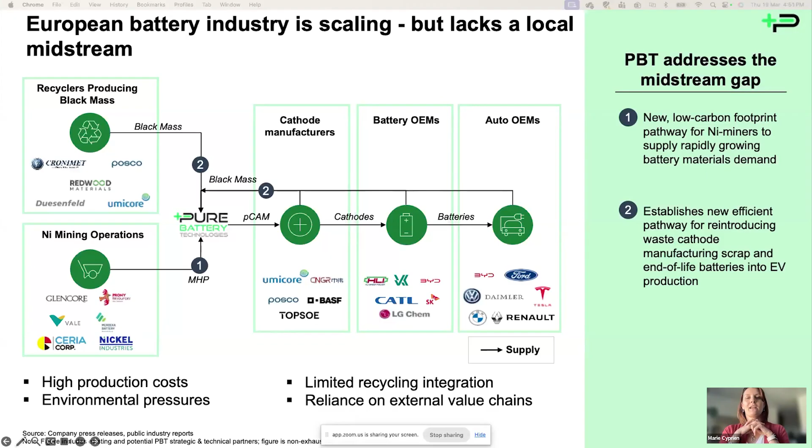Ultimately, it is blocking that full circularity to enable recycled material to come back into the supply chain. This is the gap that PBT is aiming to fill. We want to create a new low carbon pathway for raw material to enter the European supply chain, and also a new pathway for recycled material to re-enter that same supply chain. We want to do that by refining locally, building up resilience with a low carbon footprint and being cost competitive, because if we're not cost competitive, there is no way we can sustain it in Europe. So we have to do it differently to meet this objective.

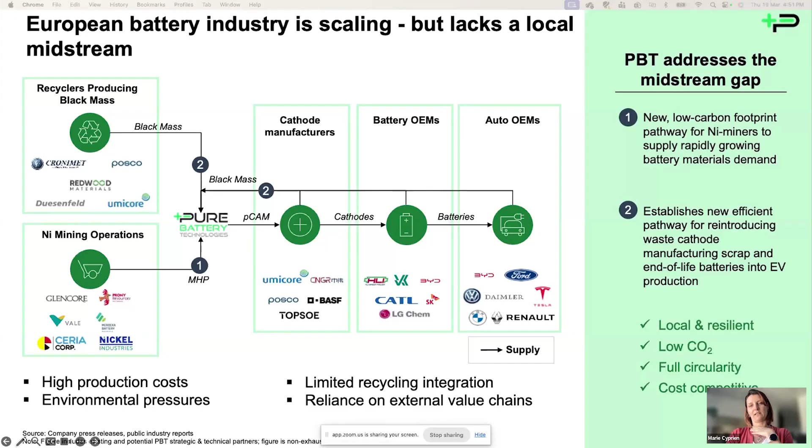So what we propose is to use our technology to refine MHP and black mass directly into pCAM in Europe. pCAM is the precursor to cathode active material, one of the key elements in the cathode that is a key driver to its quality, cost, and performance. PBT was founded in Australia in 2017 based on technology developed at the University of Queensland. We've developed and patented both the SAL and CL technologies that enable us to produce pCAM directly from MHP and recycled black mass. Let me tell you a bit more about these technologies.

The SAL and CL are really changing the way we make pCAM. A very common route until now is to use solvent extraction, which means refining each metal individually, separating them, crystallizing them, turning them into pure salts that then we mix back together to make the pCAM. That requires a lot of steps and a lot of energy. Our technologies enable us to keep the metals together and produce the pCAM directly without making the salt intermediates.

The other key differentiator is that we can process both MHP, which is a mine intermediate, the mixed hydroxide precipitate, and black mass, the recycled material from end-of-life batteries, together or separately through the same processing line. So we don't need separate plants to deal with them. We end up with a much simpler process, meaning less equipment, less energy, less reagents. We don't need solvent, and that ends up with a much lower carbon footprint and a lower cost, which makes it competitive and viable in Europe.

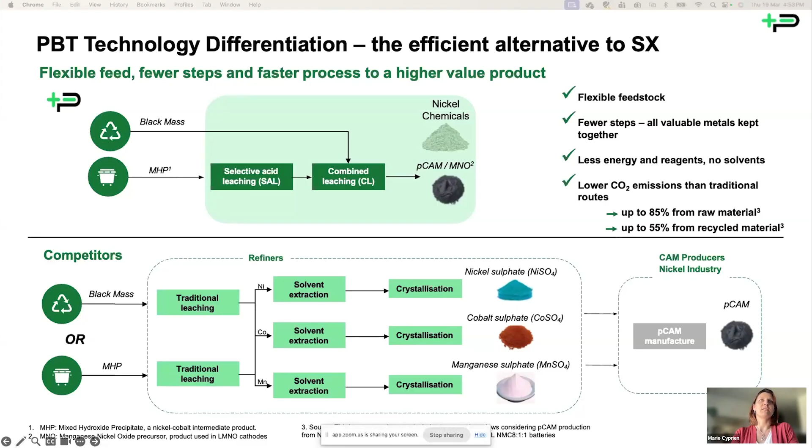And that's where we plan to use it. PBT has a refinery in Hagen, Germany, that is already producing nickel product. We've got a very talented and expert workforce that has been producing nickel product for decades. We've been able to retrofit equipment in the refinery to prove at industrial scale our technologies.

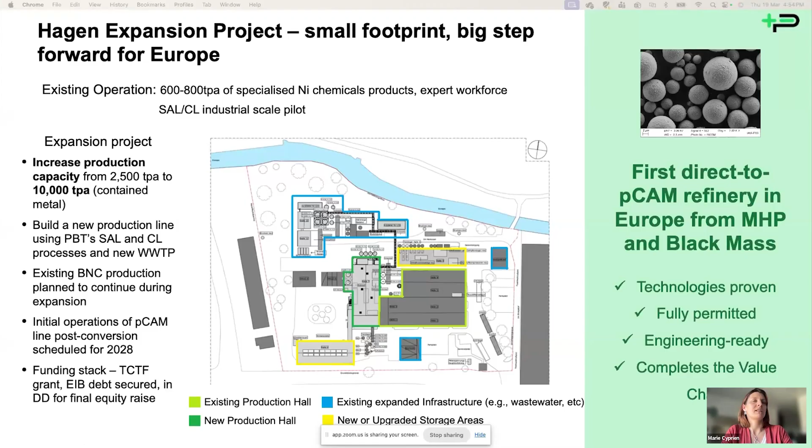So we have planned a full project in this refinery, basically a full expansion to become the first direct-to-pCAM refinery from both black mass and MHP, where we can produce 10,000 tons of product in metal. The technology is proven, it is fully permitted, the engineering is ready to move into execution, and we're running through the final round of funding so that we can make it happen.

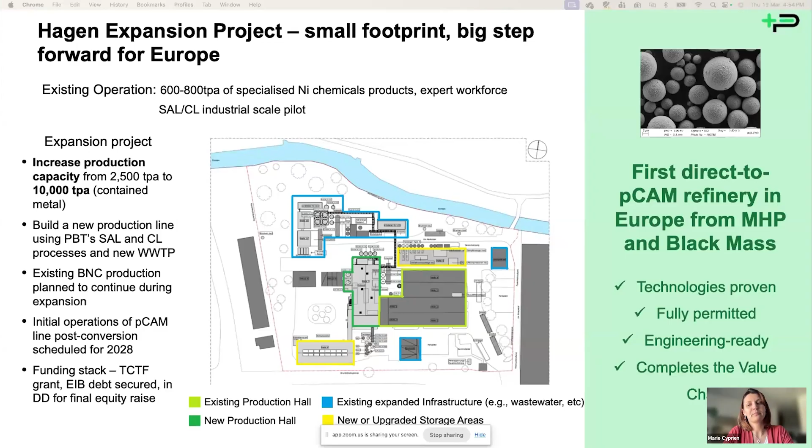And we get the circularity that we need in Europe. So that's where we're at. Thank you, and I would welcome any interest in our projects. We are running through the last round of funding, and we're also growing and looking at some expansion projects in other places of Europe, Indonesia, and US. So any interest, I would be happy to discuss. Thank you.

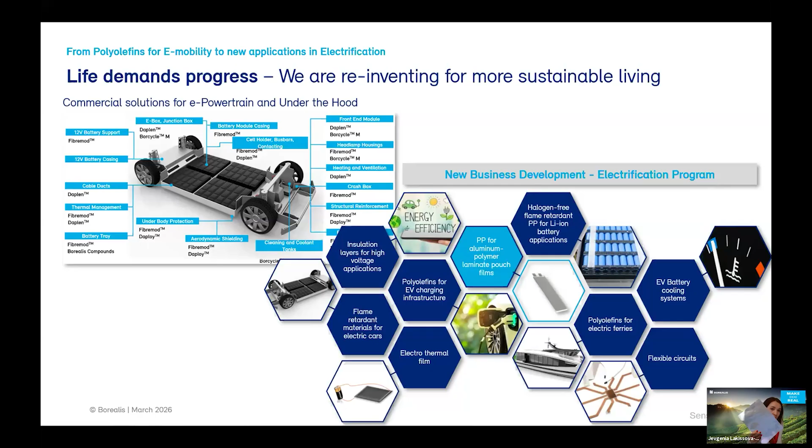What we are offering is the material that can be used in the laminate that keeps the cell together. I will come to this in a moment. Typical pouch cell packaging is a multi-layer structure. So what you see is an end product, but the critical element where Borealis can add value, and does add value, is the inner sealing layer. Maybe it doesn't come across very clearly, and maybe it doesn't look very impressive, but it's actually a thin 80 microns casted polypropylene film that essentially prevents any leaking in the pouch cell due to its sealing strength.

The difficulty of working in this industry is that we're a few steps down the value chain, but at the same time, if our polypropylene formulation fails, then the cell will fail, the sealing properties will not be achieved, and it leads then to a safety issue, essentially. So that's the product I'm pitching today, the polypropylene for creating this inner sealing layer within the pouch cell laminate.

Since it's a pitch, I wanted to maybe say a few words also on why it's important to bring this product to the European market. We are all aware of the Critical Raw Material Act, or the Battery Passport coming into force next year. Now, polypropylene is not a critical raw material, there is supply, but what we're seeing with geopolitical events, the supply of essential elements of the battery, of the cell, can become a risk for scaling up operations. So having this type of materials available locally is very important. It not only improves the lead times in the operations, but it's an essential part of de-risking the scale-up strategy.

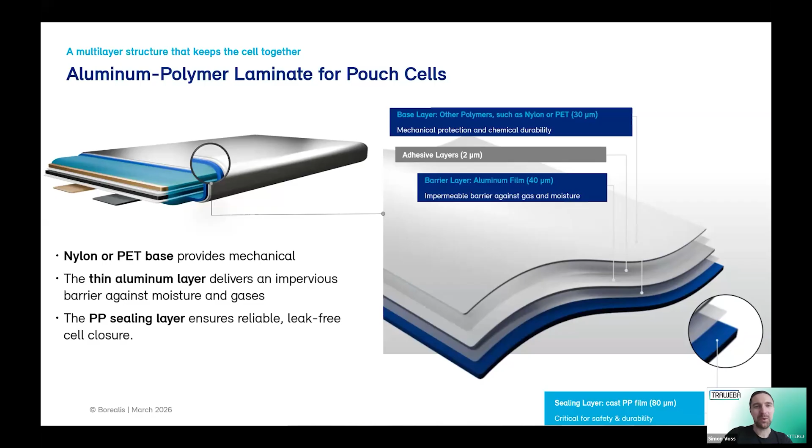If you consider a battery, it mostly is just a black box. And if you have ways to see what happens inside of that black box, that is very important. Mass spectroscopy could be one of the ways to actually see what is happening inside and give us really valuable information about degradation processes happening in the cell. That can be really valuable information for a lot of different questions and also optimization of the cell.

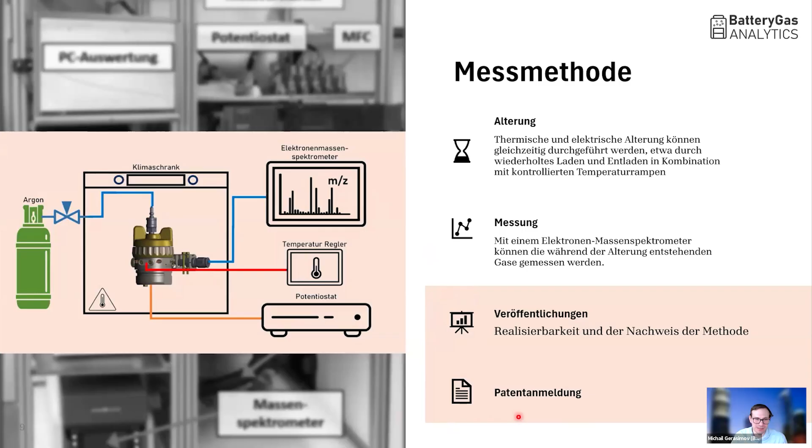These measurements have already been published at some points, and we're also currently in the process of getting the patent for our measurement stand to be able to offer the service exclusively to you.

What kind of services do we want to offer? Well, there are 3 levels, basically. You can send us materials, and they can be secret, so we do not need to know what kind of materials you send us, and we just measure them. We can also analyze the gases if you tell us what materials we have, and also simulate them, which is the last layer of our company.

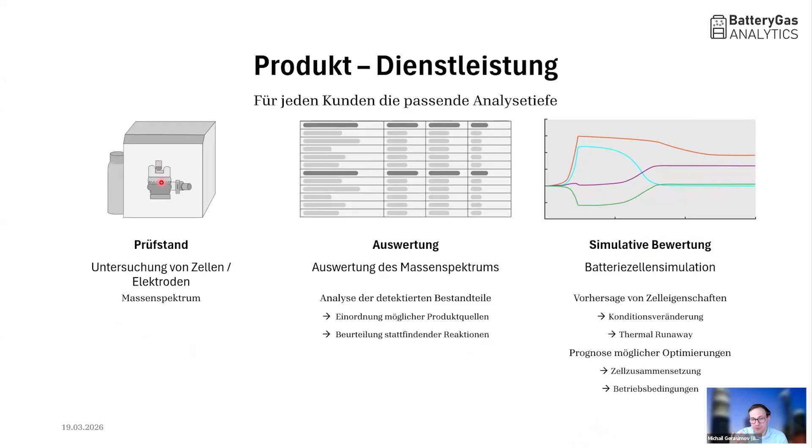So basically simulate what is happening inside. For instance, SEI changes, at what temperature do they have? Maybe with another additive, it changes again. So you can see, after evaluating it in the simulation, we can come back to the measurements then with, for instance, new additives and test the batteries again.

So what is the team behind our company? As I mentioned, Richard and Luca are both my co-founders. One guy, Richard, is looking at the simulation stuff, and Luca for the measurements, and me being the head of our company. We're currently, like a lot of people, looking for investors and potential partners to investigate it even more and basically run the services now.

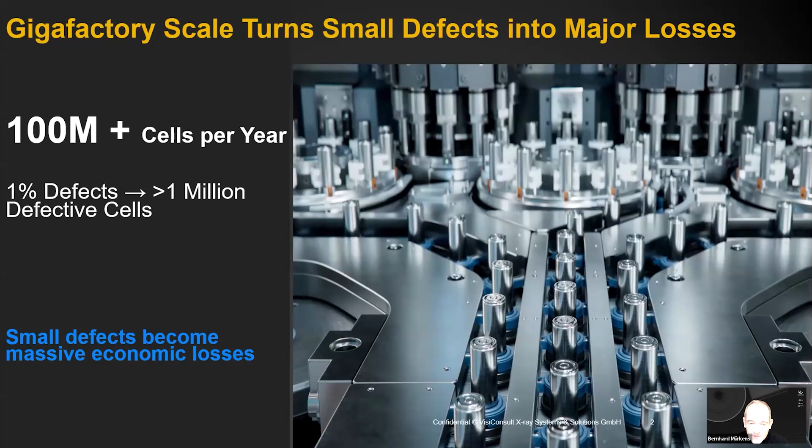Today I will show you how scaling battery production requires scaling quality inspection. So what does it mean? At Gigafactory scale, we're talking about 100 million cells. And even a small defect rate means about 1 million defect cells a year. So you can imagine then small defects become a real massive economic loss. Keep this in mind for the stage.

So when you look into what's done today, electrical testing is just producing indirect results. An external inspection with cameras only shows the surface. A post-process analysis always gives you delayed feedback. So what's important is there's no direct link between a process parameter and an internal defect. You really have to see that this is a gap.

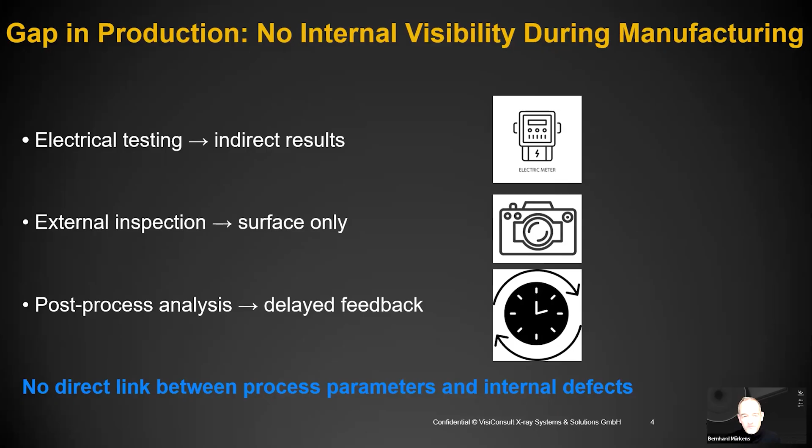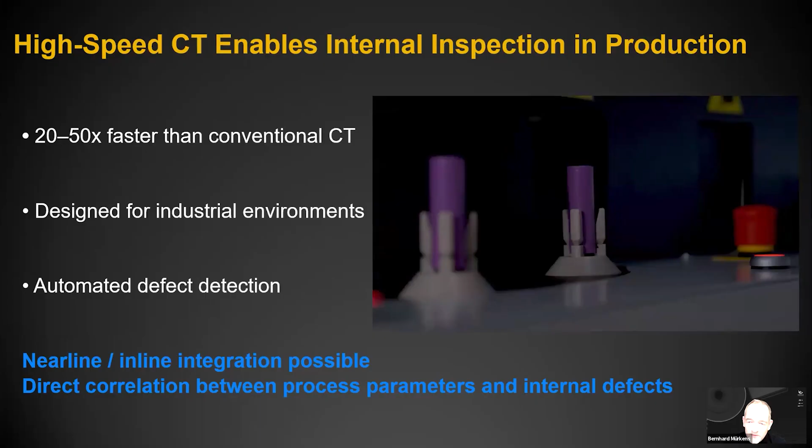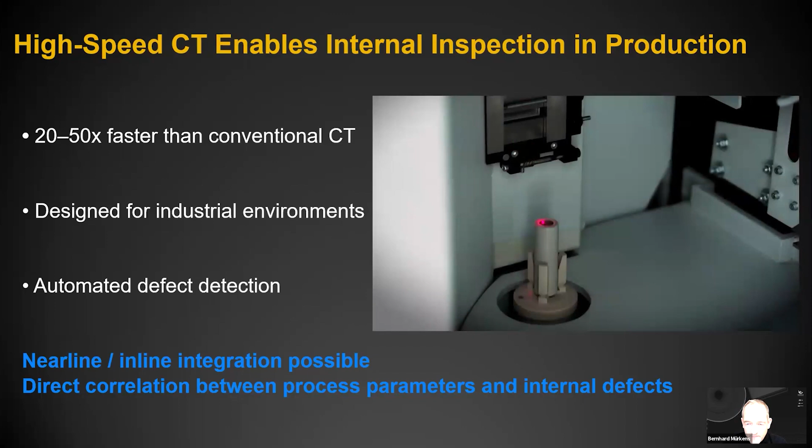And that's where high-speed CT comes into place. This is high-speed CT for inspection in production. It's 20 to 50 times faster than conventional CT. It's really designed for industrial environments, and it's able to detect defects automatically. What you see here is really a direct correlation between process parameters and internal defects.

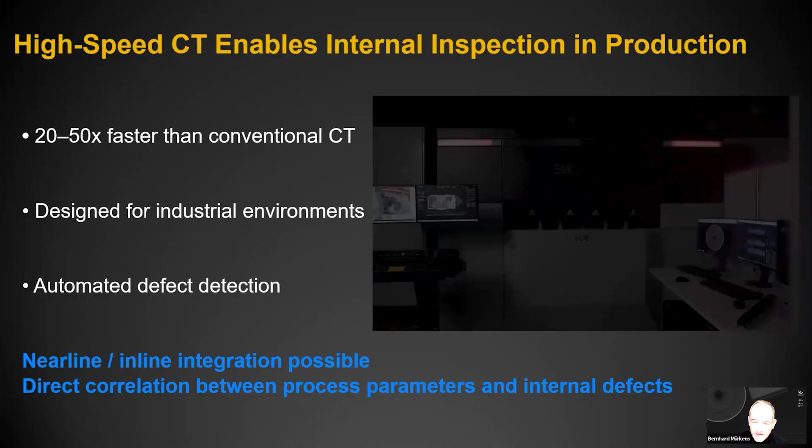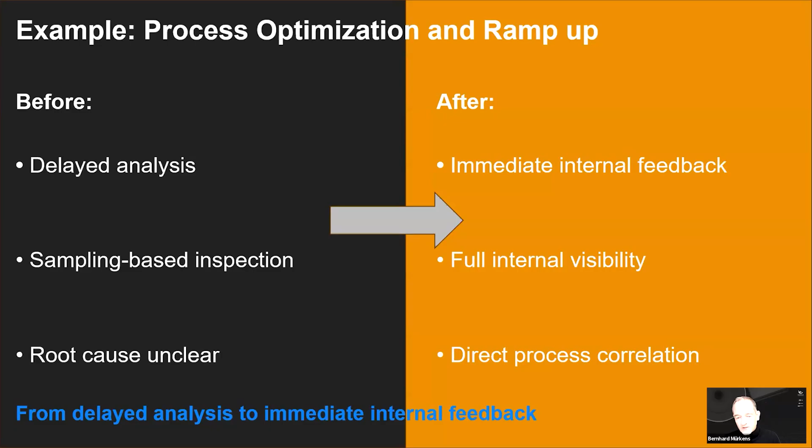So what does it mean, what's the impact? When we have a ramp up or something like this, how is it today? Today you have a delayed analysis, a sampling-based inspection, and also the root cause is unclear. When you now use inline CT, you have immediate internal feedback, full internal visibility, and a direct process correlation you can rely on. So it's from a delayed analysis to an immediate production process monitoring with internal feedback.

And for sure, yield is here the largest lever of value. A 1% yield improvement, and you all know the metrics, can save you about 6 to 7 million euros annually. This is done by reducing scrap, a faster production ramp up, and stabilizing your processes. This is just one of the many use cases where people can save money utilizing this technology.

So at the end, it's an inspection paradigm shift, like Simon mentioned a little bit in the beginning. It's from external late analysis with limited insights to internal visibility, real defect detection, and direct process feedback. So it's everything else than before, meaning you move from a black box production into a data-driven manufacturing.

And of course, you can integrate this into the line, either near to the line for process development, or make an inline integration for critical process steps, and you can definitely scale it to your inspection strategies. So the message is it's a flexible deployment depending on the requirements on the factory floor.

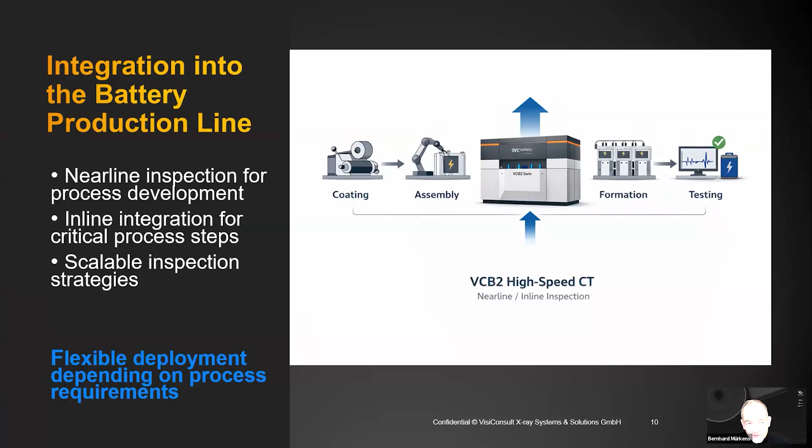When you look into the future, battery production is getting even more complex: higher energy densities, more materials, new cell formats, and the factories are getting bigger. What they all need is more inside views.

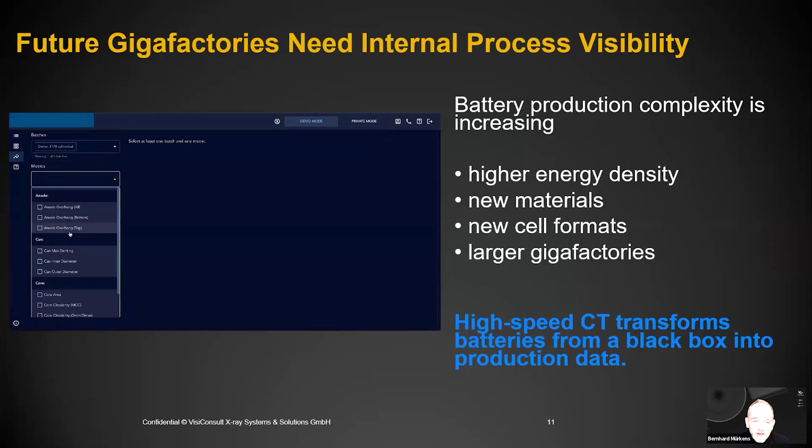This is where high-speed CT comes in. We provide the data to monitor the process, so you come away from not knowing to knowing. High-speed CT transforms batteries from a black box into real production data, and you've seen a lot of examples on the screen.

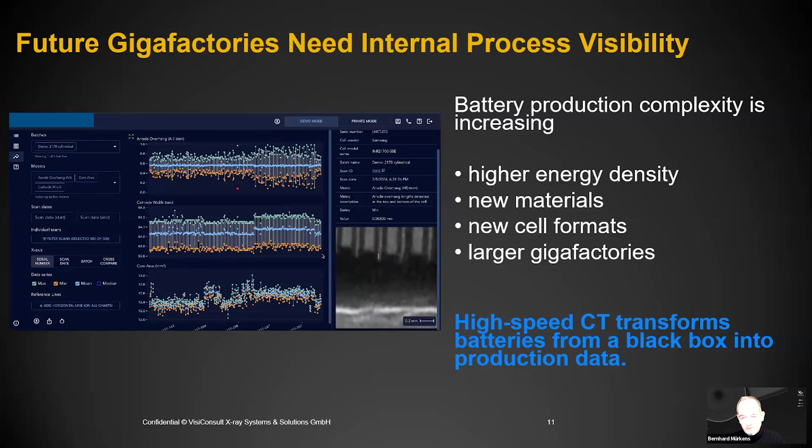Do you deliver turnkey containers with dedicated instrumentation directly on Gigafactory site? Well, it's a turnkey solution, so in a nutshell, yes we do. The key element when we talk to the big gigafactories is how the cells are coming to our machines, and then it's about automation integration to our agnostic machine, whether cells come in trays or on pucks - it doesn't matter for us.